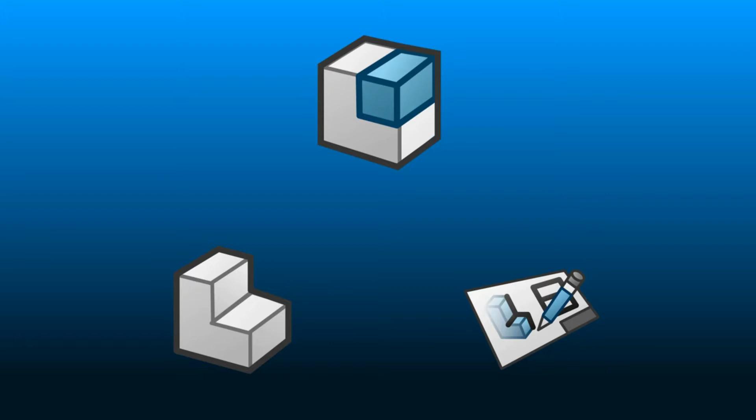Whether you work in a large organization or just a small team, no doubt you're concerned with storing, managing, and collaborating on your design data. And it's tricky, because SOLIDWORKS parts, assemblies, drawings, and other supporting documents are all linked. Consumer cloud storage apps don't know how to handle that. Maybe the investment in SOLIDWORKS PDM and Manage isn't right for you.

There is another way. When you connect SOLIDWORKS to the 3DEXPERIENCE platform, cloud data management is just a few clicks away. Eric Engineer and Debbie Designer are part of the team working on the Nemo submersible. They are on a tight deadline to finish up the hatch design.

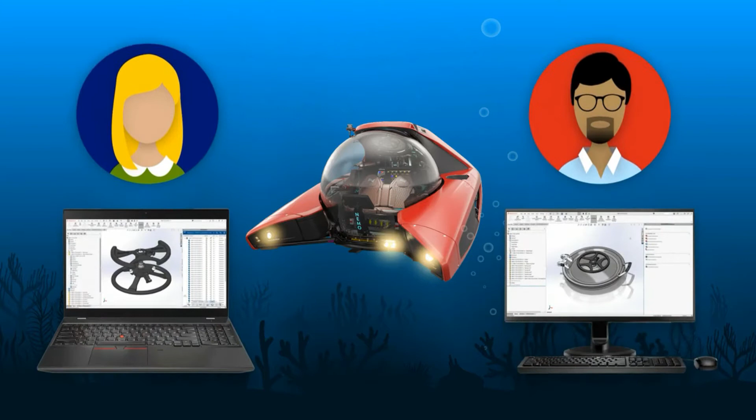Eric puts the finishing touches on the latch mount by inserting fasteners from SOLIDWORKS Toolbox. A quick check on the assembly drawing, and everything is up to date and ready to save to the cloud.

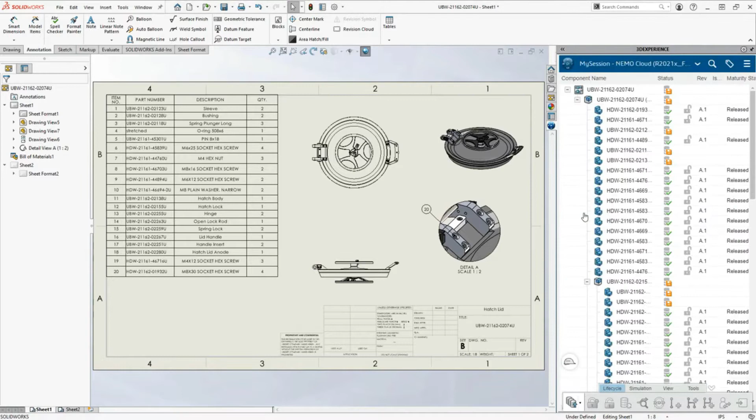First, he logs into the 3DEXPERIENCE platform. It's his team's secure connection to the cloud. Right from the task pane, he sees the status of his work. These indicators show which components need to be saved.

As for the hardware and other standard parts, SOLIDWORKS is configured to automatically catalog and release these items so all users can access their shared libraries online.

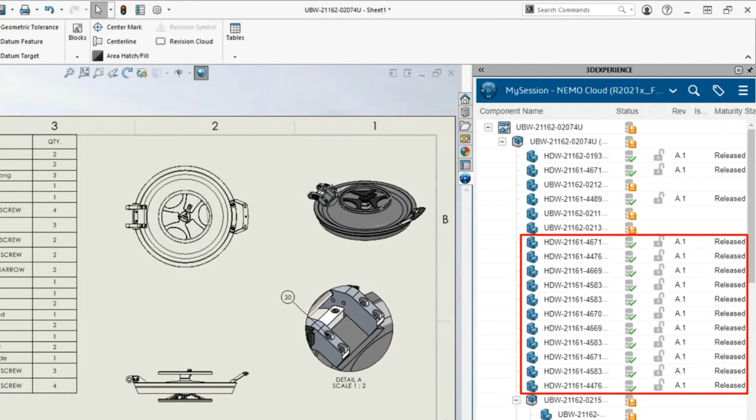The Save dialog shows exactly which items require an update. He can also assign any item to a bookmark, such as related drawing files. Out of a long list of components like this, bookmarks are a convenient way to flag them for easy access.

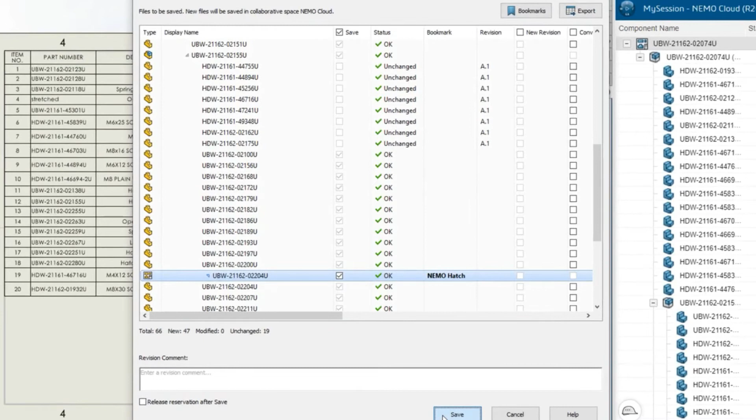Only the new or changed items need to be uploaded to the cloud. This makes efficient use of network bandwidth, but still ensures everything is up to date.

As the leader of his team, Eric is able to release his own designs. Easy-to-use lifecycle operations like this help the team avoid accidental overwrites.

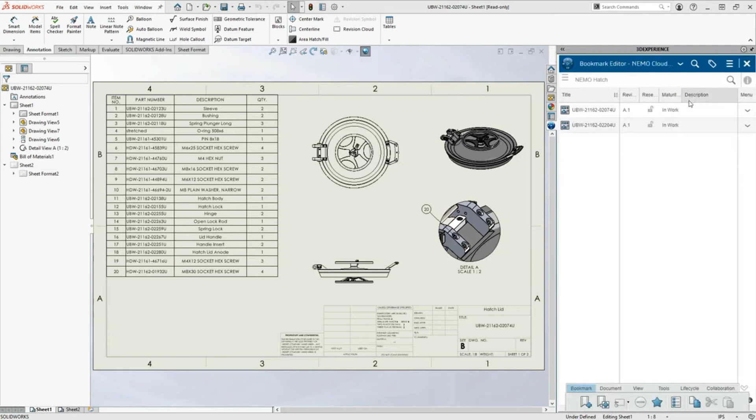Switching over to his Bookmarks tab, he sets the related part and assembly drawings to Released. It's just 2 drawings for now, but as the detailing work continues, the bookmark will keep everything organized for quick access.

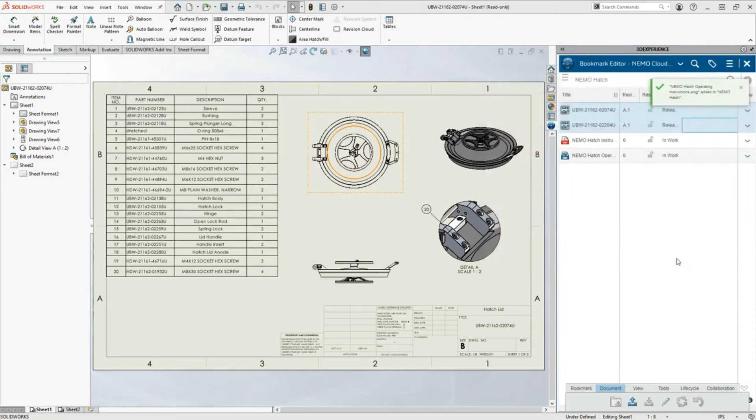That includes any other supporting documents, like this PDF instruction sheet and the related SOLIDWORKS Composer file. Most document types can be previewed interactively within the SOLIDWORKS task pane. No need to launch external viewing apps.

Eric has a backlog of finished designs that also need uploaded to the cloud. He can automate this with a batch save. He just selects his local design folders and assigns them to the appropriate cloud space. SOLIDWORKS takes care of the rest.

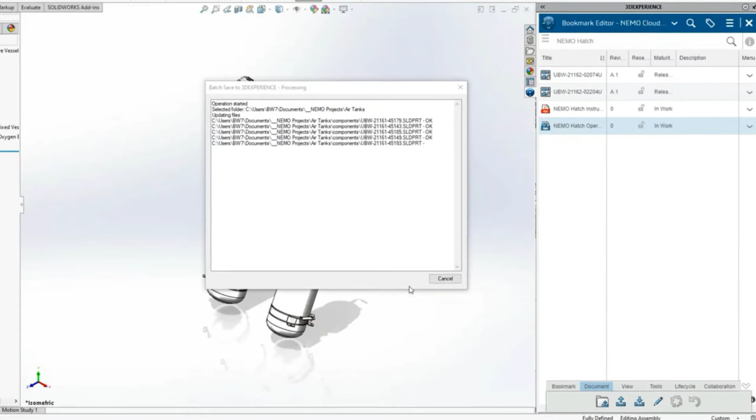As the Nemo sub-design evolves, the team must respond to change orders quickly. Debbie logs into her session and sees a message from Eric requesting a change. A quick keyword search shows several results. This one looks right.

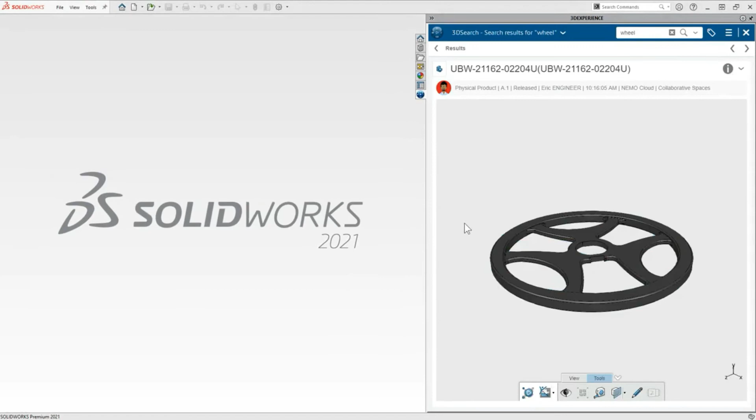Debbie uses the 3D annotation tools to quickly sketch out a couple ideas. From here, she opens the part in SOLIDWORKS. The latest version is automatically retrieved from the cloud.

Before she makes any changes, it's best to do a where-used search. The hand wheel is used in one subassembly below the master hatch assembly. She can open that right into her modeling session and get to work.

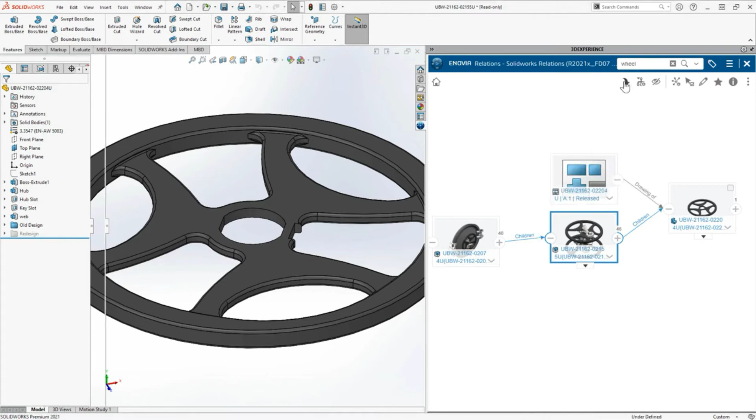This version of the subassembly is released. In order to make changes, Debbie needs to create a revision of the assembly and the hand wheel. The status indicators immediately show that the current assembly structure is out of date.

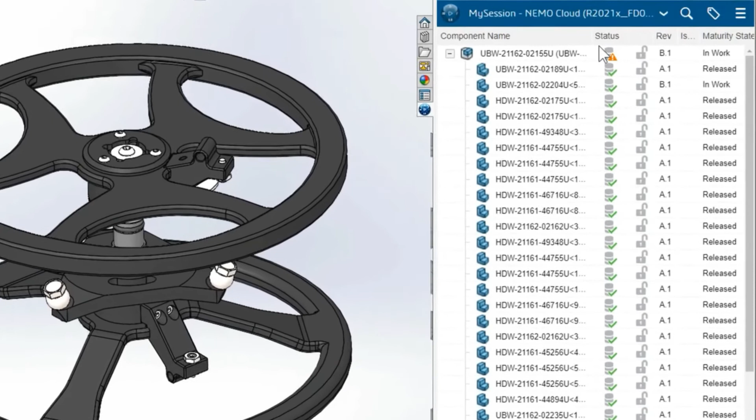So she replaces it with the new revisions and sets them to reserved. This gives her write access to the items she needs to modify without locking other users out of the rest of the assembly.

The redesigned hand wheel looks great, but she needs to update the drawing. The shared bookmarks give Debbie quick access to the related drawing files.

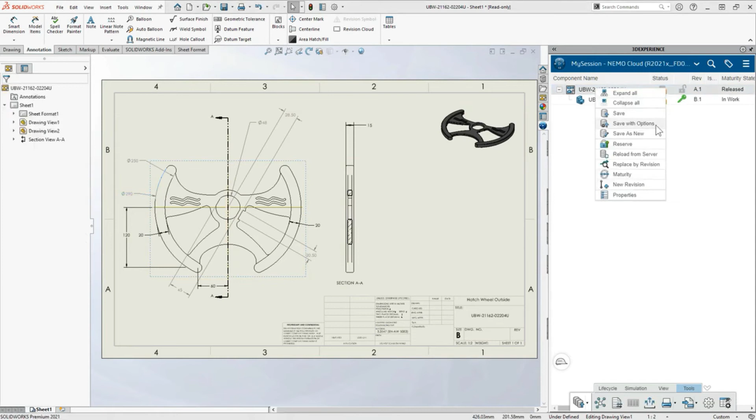The drawing is now in sync with the part model, so she saves it to Revision B, then sets the part and drawing to a frozen state so they can be reviewed.

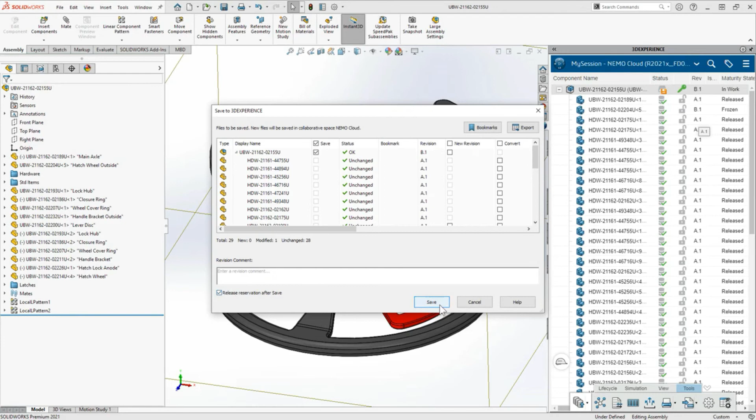Returning to the assembly, she finishes out the design by adding the latch mechanisms and saves the new revision back to the cloud.

In order to meet their tight deadline, the Nemo team often needs to work on the same design files at the same time. Eric is working on a new revision of the master hatch assembly.

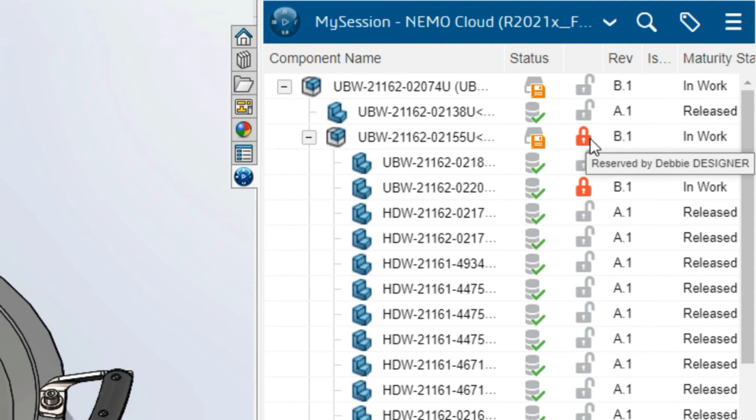These icons let him know Debbie has the hand wheel assembly reserved and is currently making changes. He can reserve the top-level assembly without affecting Debbie's work on the subassembly. This modular approach to access control allows users to design concurrently without accidentally saving over each other's progress.

A short time later, Eric sees that Debbie has finished up. He just needs to reload the latest version of the subassembly from the server.

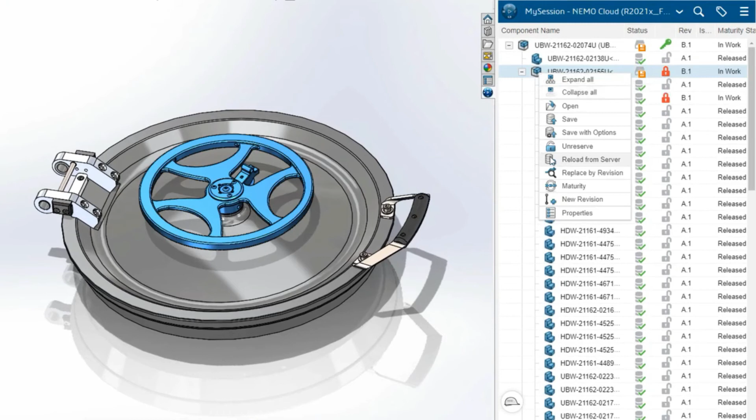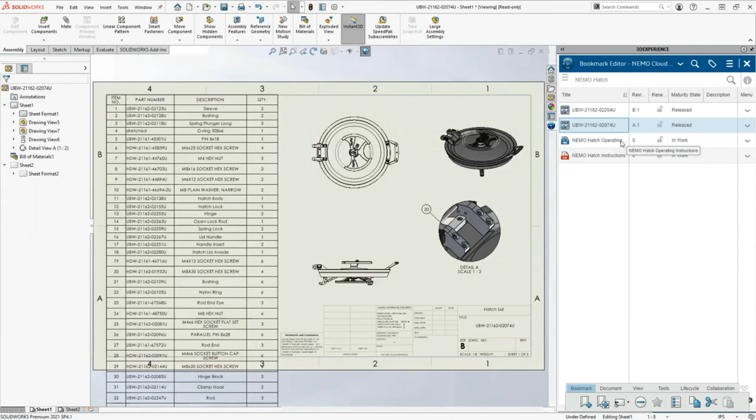Taking a look at the hand wheel drawing, he likes her redesign and moves it to released. Back in the assembly, Eric attaches the connecting rod mechanisms, then returns to his bookmarks to update the drawing. Bumping the assembly and drawing to revision B, he's ready to save.

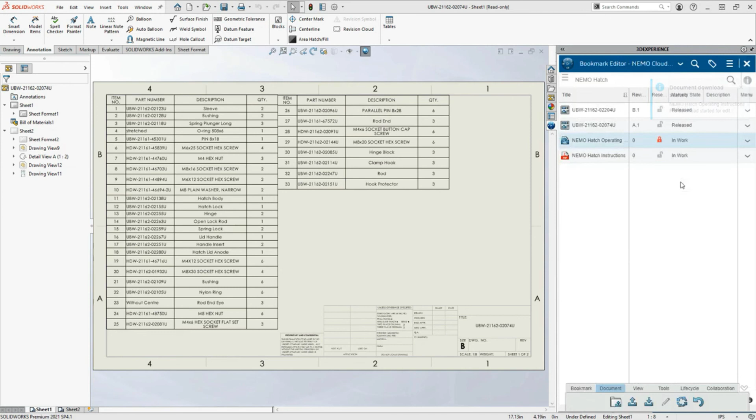The revised hatch assembly requires new versions of the supporting documents. From the convenience of his Bookmarks tab, Eric uploads the latest version of the Composer file and uses the interactive preview to inspect the latest revision.

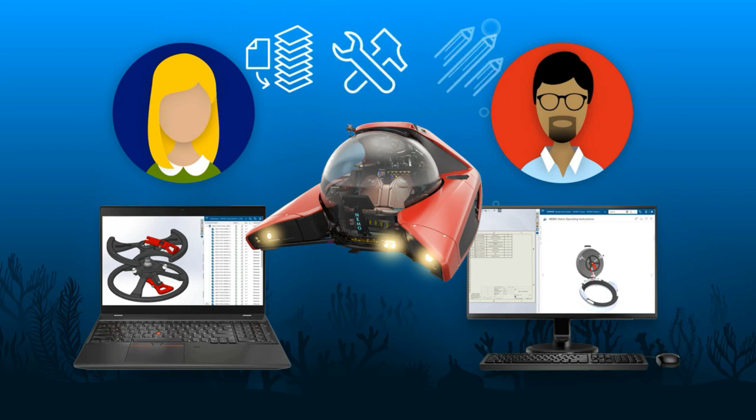Out-of-the-box cloud data management enabled the Nemo team to be productive right away. They were able to safely store their data, manage changes, and design concurrently, all without ever leaving their familiar SOLIDWORKS design environment. Everyone in the organization benefits when you connect SOLIDWORKS to the 3DEXPERIENCE platform.